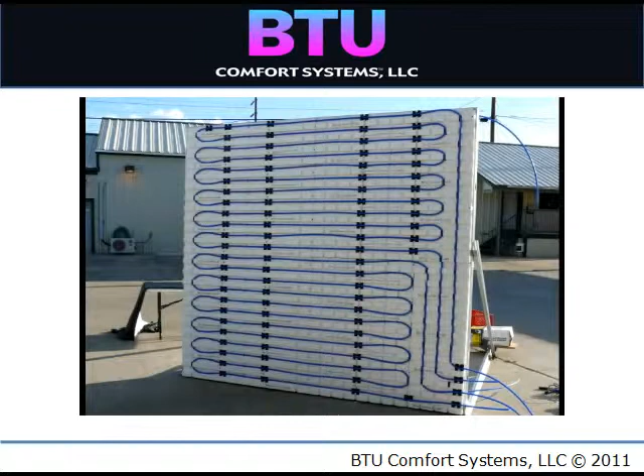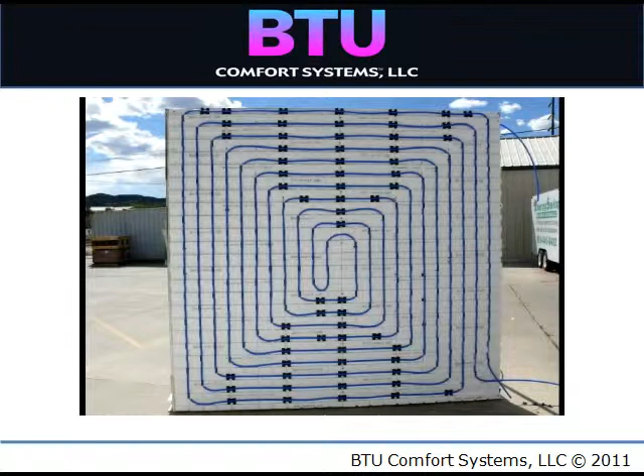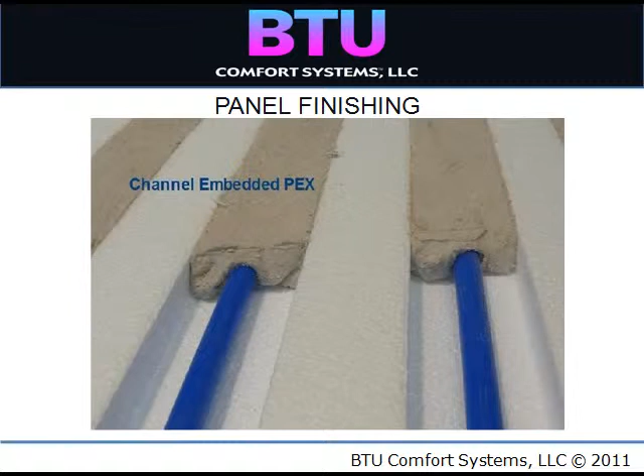Properly mixed and applied transfer mediums allow you to place both the embedding channel material and finished surface coats all in one day, depending upon the job site size and ambient conditions.

A key system design feature is how the tubing is suspended in either channel above the base and between the channel walls. This allows for a 360-degree embedding of the mass transfer medium, be it stucco, plaster, drywall, earthen plaster, or a material of similar properties. The entire channel surface becomes an energy transfer medium with a flywheel effect from the applied mass material.

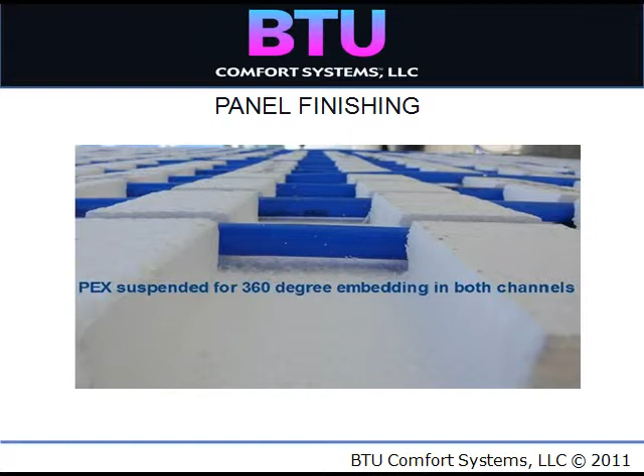Finish coats are driven by aesthetics, the mass desired, and local codes. These too can have non-shrink fibers in the mix. Finished surfaces are as varied as your imagination and skill levels allow. Integral coloring of finished mix can be done, abating painting cost. Print embossed patterns can be applied as well.

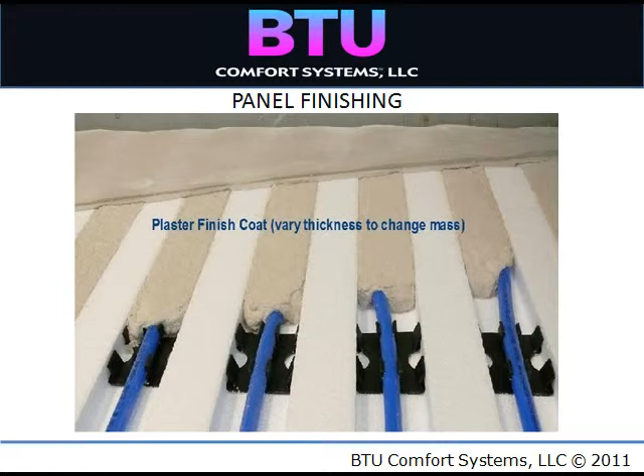Exterior surface finishes have additional considerations: breathability of the material or waterproofing qualities desired. This slide shows the process: clips in place, the serpentine pattern of the tubing partially embedded in channels, and the surface material applied.